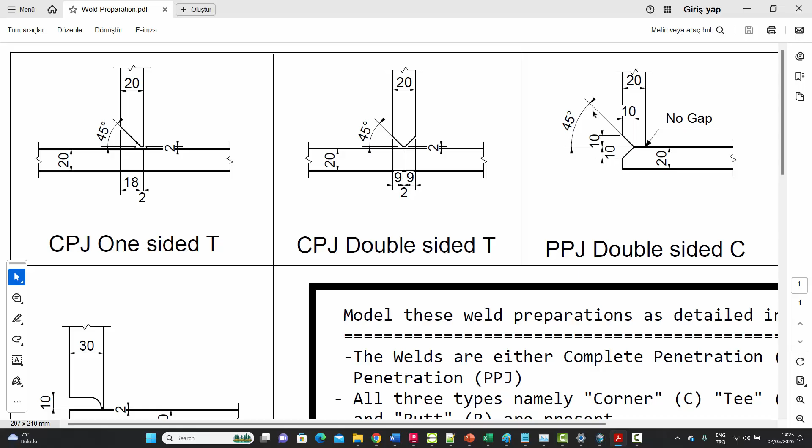This one is a complete penetration joint with the J type preparation, 20 millimeter thickness over here, but the incoming plate is much thicker. And so the cut is going to be done like this with a 2 millimeter root gap over there. Then we have a butt weld situation in which, once again, it's a complete penetration joint, 20 millimeter thicknesses. One side, this type of weld preparation. Whereas in the other one, it's a 40 millimeter thickness plate. Once again, butt weld and complete penetration, and the details are given.

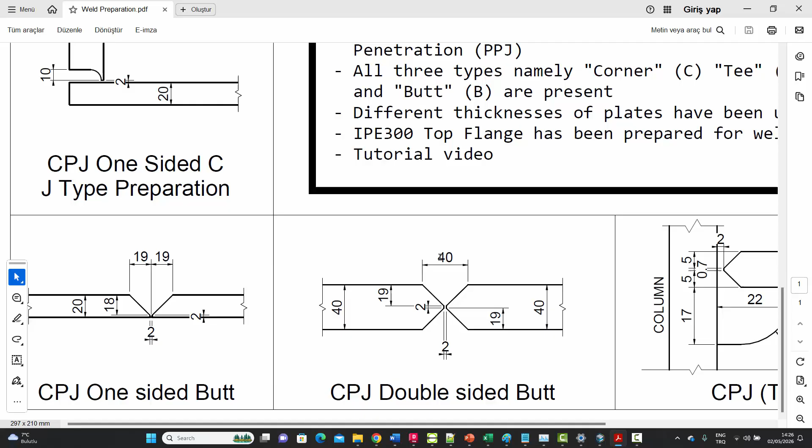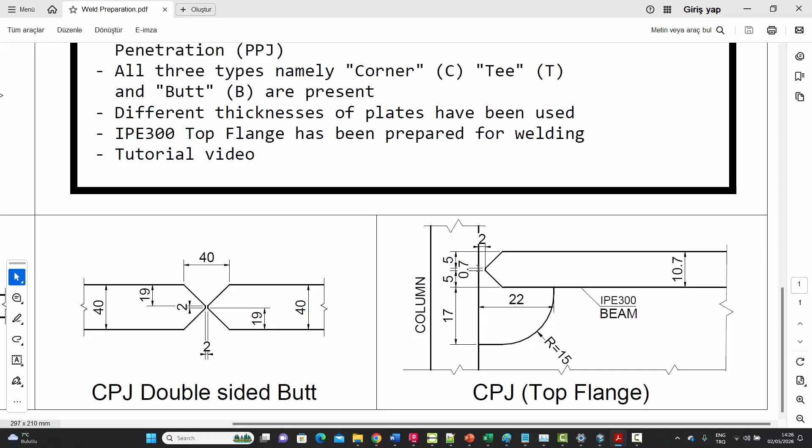The last one is the top flange of a beam and a column. The incoming beam's top flange is going to be cut like this. This is usually called a rat hole, in which this is a complete penetration joint, double-sided, and all the distances are given over here. This is basically the exercise which we are required to do.

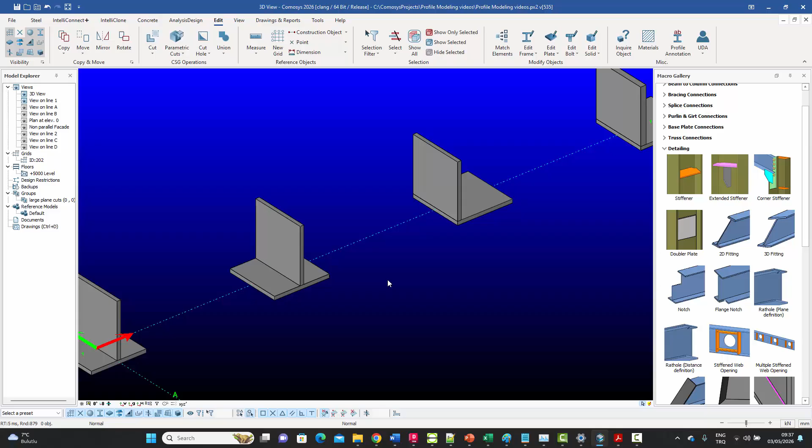So let's begin with the first one, which is basically a T joint with a one-sided weld preparation as shown, 20 millimeter plates. Let's go to the model. I've already created these 6 situations for the plates. So 2 T joints, 2 corner joints, and 2 butt joints, and then also the case of the top flange of the beam. So right now we'll just focus on this one.

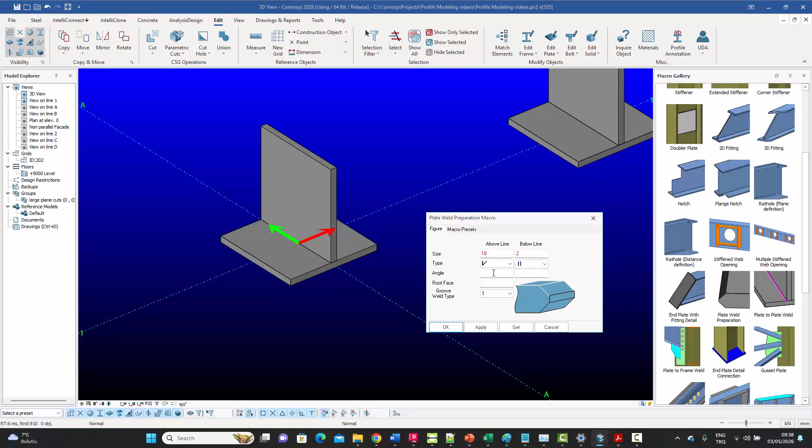So when we want to create weld preparations, we can go to the detailing menu, and under the detailing menu you have this command called plate weld preparation. If you hold the shift key and open it first, what we want is a one-sided weld in a 20 millimeter plate with 18 millimeters. So we can say 18 over there and 2 remaining. For this we choose this symbol, which is the one-sided weld, and for this one we choose this symbol. We don't need to enter the angle, it's 45 degrees by default. It's a T weld, so we apply.

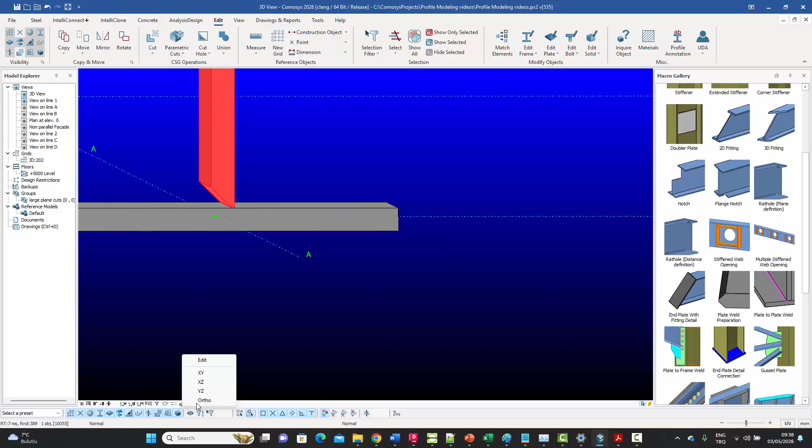Okay, and then we just click on this button, and we basically just click on this edge of the plate. And the moment we do that, let me right click and finish it and turn off the welds. If I look at it from the side, you will see that the exact weld preparation has been made. There's a 2 millimeter gap over here. I can measure this distance. Actually, I didn't enter this distance, so let's undo that and do it again.

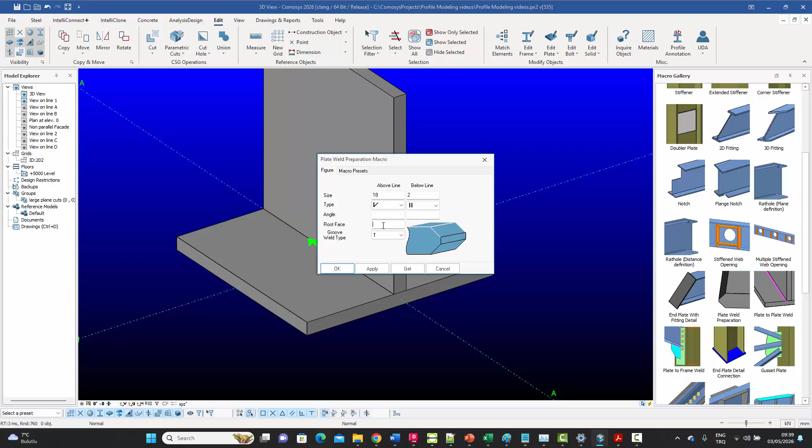We can go back into this command, press the shift key once again. These are okay, but the root face, this is the one I forgot to enter. We can enter it, that's 2 millimeters again. If you go back to the drawing, this is basically this distance of 2 millimeters away from the edge of the plate. So that's the one I had missed. Go back to the model. We've done the settings now. We just go in there again and just show this edge.

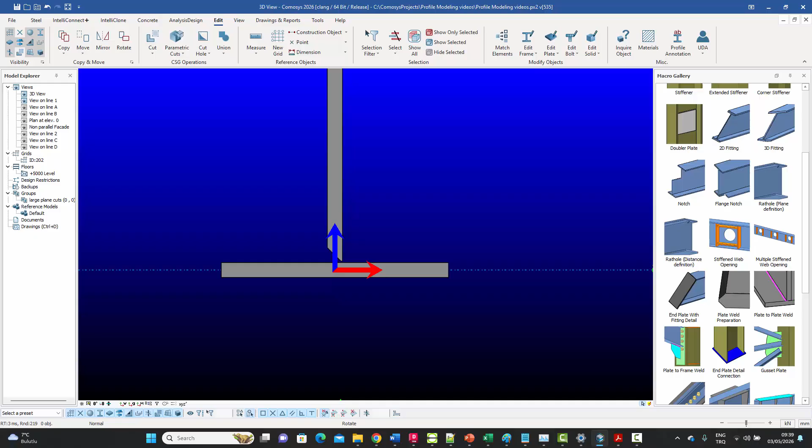And the moment we do it, once again, we can look at it from the side. Click on this button to make it orthogonal, and now we can see that it's properly done. This distance is 2 millimeters, as well as this distance is also 2 millimeters.

Now the next one is basically similar. It's just that it is double-sided, so we have the same weld on both sides. So instead of the 18 millimeters, we'll have 9 and 9 on both sides, and 2 will be left in the middle automatically. The same 45 degrees, the same 2 millimeter root face. So we go back to the model.

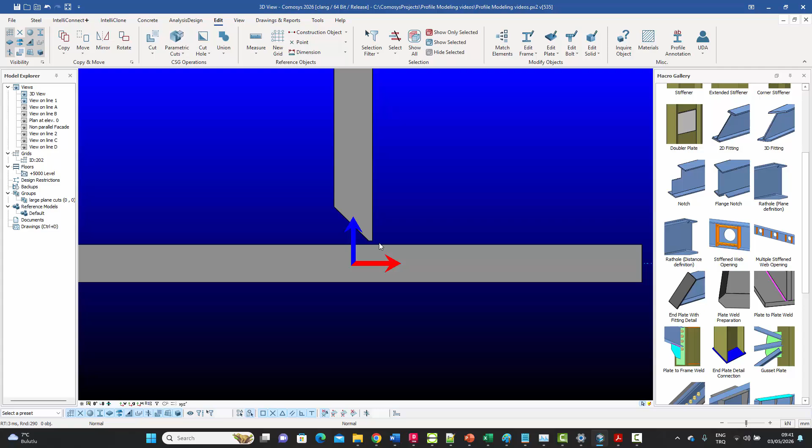We can go to this one over here now. Go back to our command, click on the shift key, open this up. This time, because it's double-sided, we choose the same symbol for both sides. We make this 9 and we make this 9 as well. So 9 on both sides, and the 2 millimeter remains. Say apply, OK. Click on the thing and just show any one of these edges.

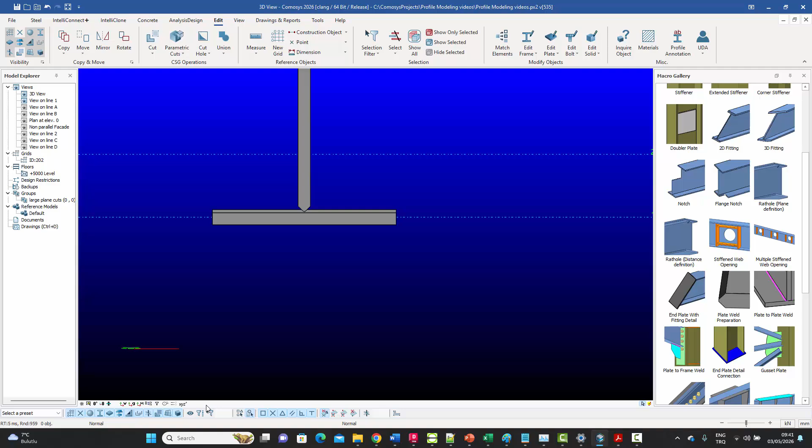And when we do that, let's go and look at it from the side, we can see that the weld has been created. The third one over here is not a complete penetration joint. It's a partial penetration joint, and it's a corner joint, and both the plates have been cut out. So this is a 20 millimeter plate, but it's partial penetration. So 10 millimeters have been cut out and 10 have been left. And also we note that there's no gap over here. So there was a 2 millimeter root gap over there, but there's no gap in this case.

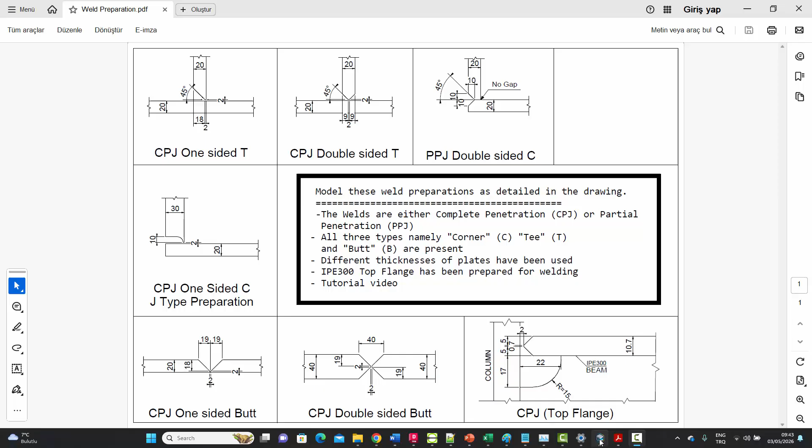So we can go back to the model. This third case over here, go back to our command, press the shift key. So we want this case now, we want 10 and we want 10. So we want partial penetration like that. We want a root gap of 0. So this is the setting which we want, and we can say apply. Okay, and we can click on this button again, and we can select.

So we don't know which edge we are selecting, whether it's the edge of the bottom plate or the other one, but it doesn't really matter because we'll need to do it twice anyways. We just select this edge, and we see that we've cut the top one, and now we can just continue and select the edge of the other one, and there we go. We have managed to create that partial penetration weld with no root gap over there.

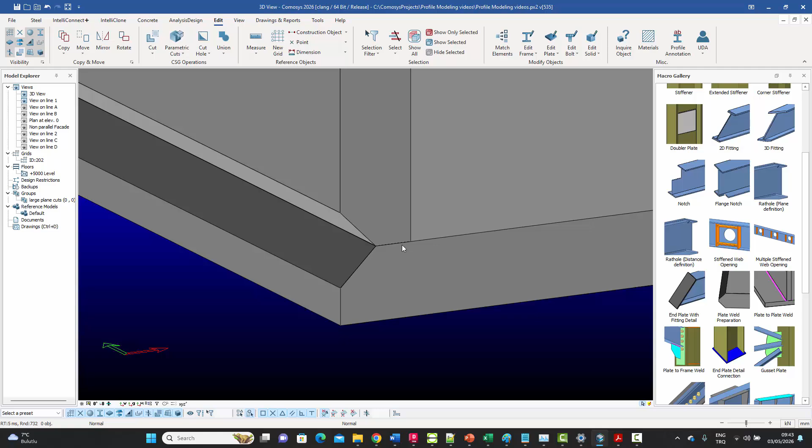The next one over here is once again one-sided, and it's complete penetration, but it's a J-type preparation because it's a very thick plate, so it needs to go like that. It's full penetration, by the way, and 2 millimeter gap left on both sides. So we go back to the model, and we come over here, and this is the one we want. So we click on the shift key, open it up. And because it's a 30 millimeter plate now, and we want full penetration, we'll call it 28.

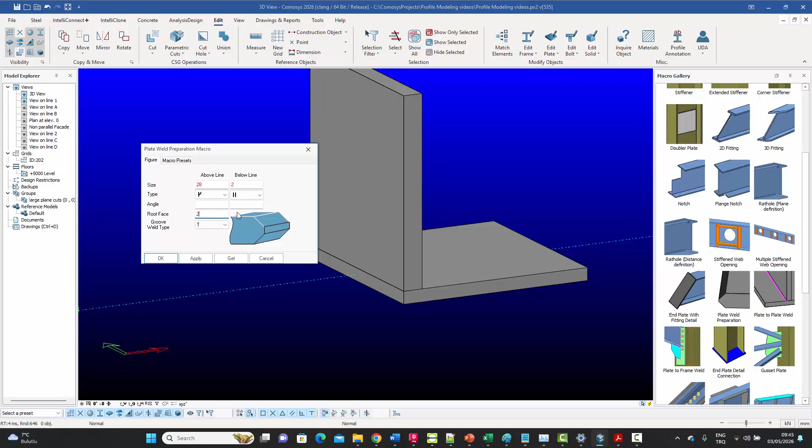And instead of this symbol, we can choose this one to create the J-type penetration. And we need the 2 millimeter root gap as well. Now let's try it first. I think we'll need to change the angle because the default angle is 45. But let's press OK on that, and click on this one and click on this one, and let's look at it from the side.

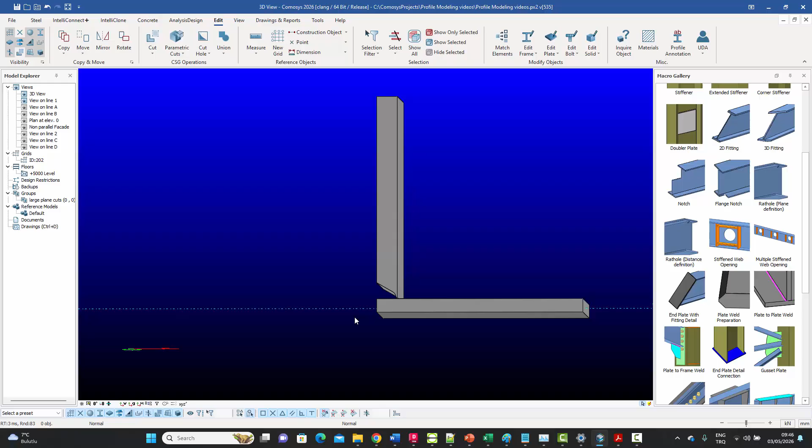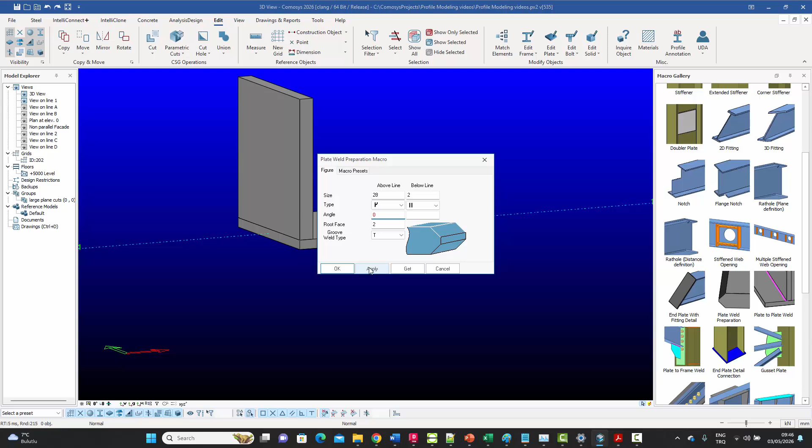We see that it has done the cut in the J-style preparation, but it comes like that, and then there's an angle of 45 degrees, which is not what we want. We want it to go like that, and we want it to come straight out. So if that's what we want, then we'll just undo this, go back into the settings, and this time we put the angle input to be 0. Apply, OK, go back inside, click on the edge once again, and this time you see that we managed to create that weld preparation as shown.

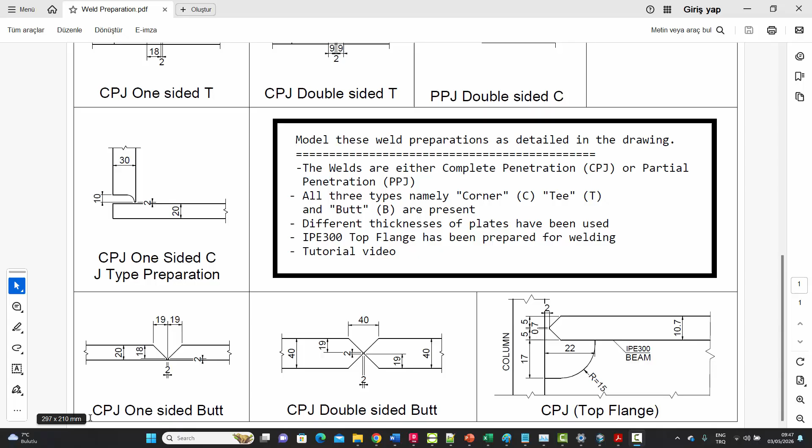This next one is a butt weld now. It's one-sided. It's complete penetration, 20 millimeter plate. So we need 18 and then 2 as shown. So what we will do is we will just go inside, go to the model. This is the plate ready for that. Click on the shift key. This time we select this symbol once again. We want 18 millimeters and 2. So we leave it like that. We'll leave the root and we'll leave the angle input empty as well.

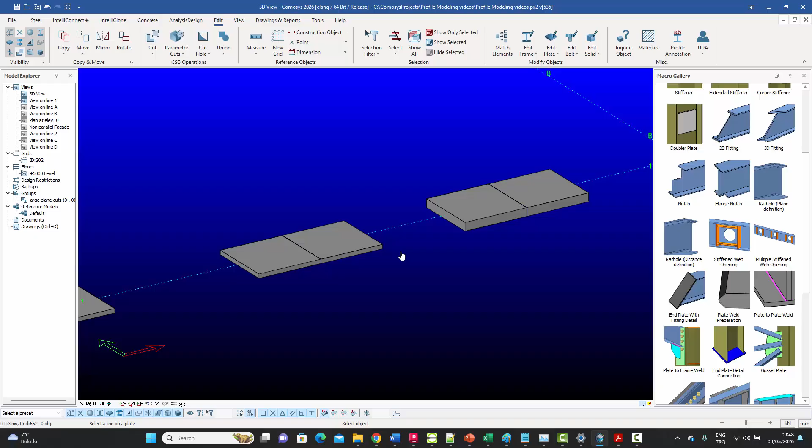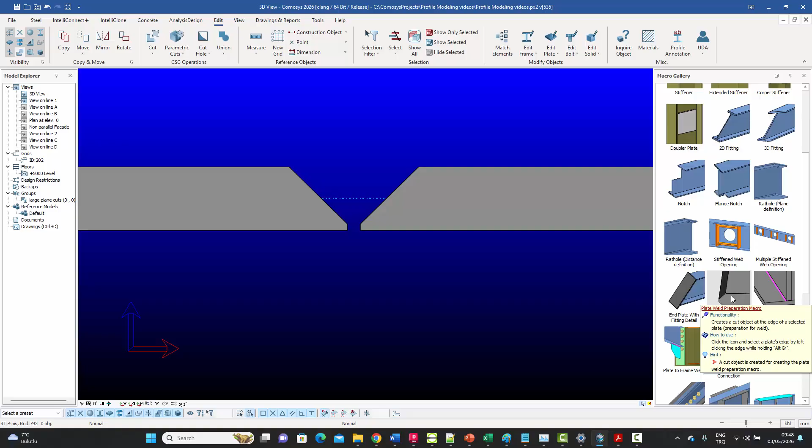Root at 2 millimeters. Apply, OK, and we can click on the command and just show this edge, and then whichever one it cuts, we just select the other edge as well, like that. So we see that we have managed to achieve the weld. Actually, now this one is actually 4 millimeters, so we should have actually inputted it to be 1 millimeter, because one is going to come from both sides.

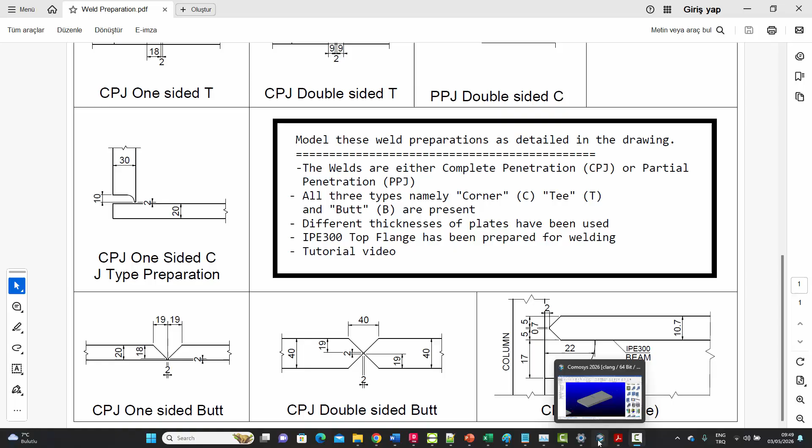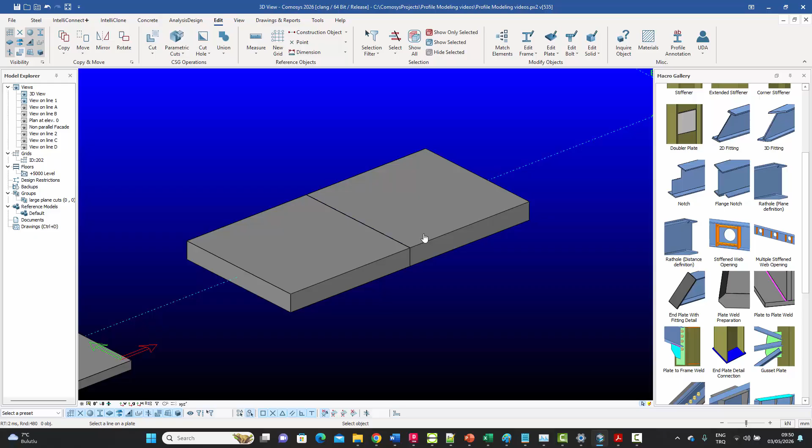This last plate example is a thicker plate, 40 millimeters, so it's double-sided. Once again, the total distance is 2, so we'll keep the root at 1 millimeter, and 19 and 19 and whatever is left over there. So we go back to the model, click the shift key, open this one up, call this 19, and change this one to the other option, like that. So we cut it from both sides, and the root face we bring it to 1, like that. Click on it, select this edge, oh, I'm sorry, I think I made a mistake. Let's undo that.

Let's press the shift key again. We need to do a two-sided one, but we need to make this one 19 as well. Yeah, sorry, that was a mistake. So 19, 19 from both sides, like that. Click on it, click on the key, so we go on that edge, so we get a double-sided one. Click on this edge, so we get another double-sided one.

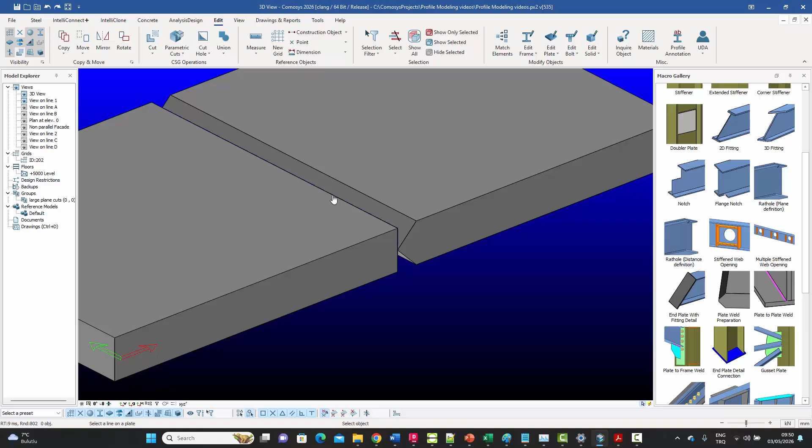Look at it from the side. Click on this one, and you see now the total distance is 2 millimeters as required. Now, this final one, which we have over here, is not a plate cut, but it's an IPE 300 beam, and the top flange has been cut out with a double-sided weld preparation, and also this rat hole at the back side. And this is what we need to create.

The distances: because the flange is 10.7 millimeters, we've left 0.7 millimeters as far as the straight side is concerned, and 5 millimeters on both sides. And then this distance is given as 22, and this total distance is given as 17, and the gap between the column face and the beam is given as 2 millimeters. So just keep those numbers in mind.

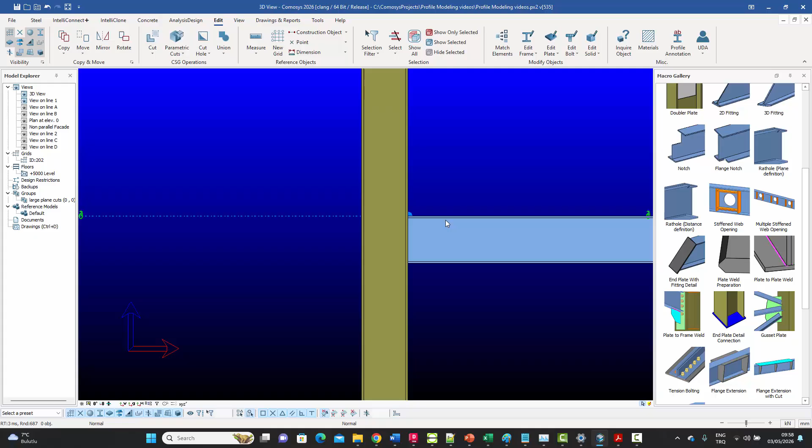We go back to the model. This is basically the beam and the column. We just zoom in like that. And this time we're not going to use this plate weld preparation, but rather we're going to use this one, which is rat hole with the distance definition. So we just click on this rat hole icon over here. We select the beam, and then we show it this point over here.

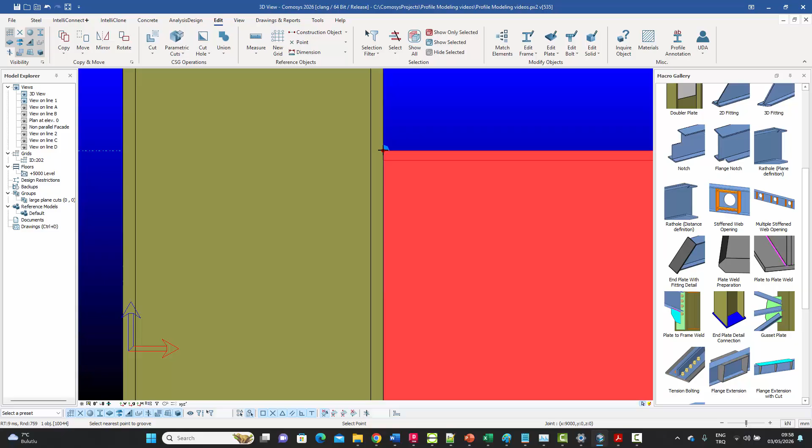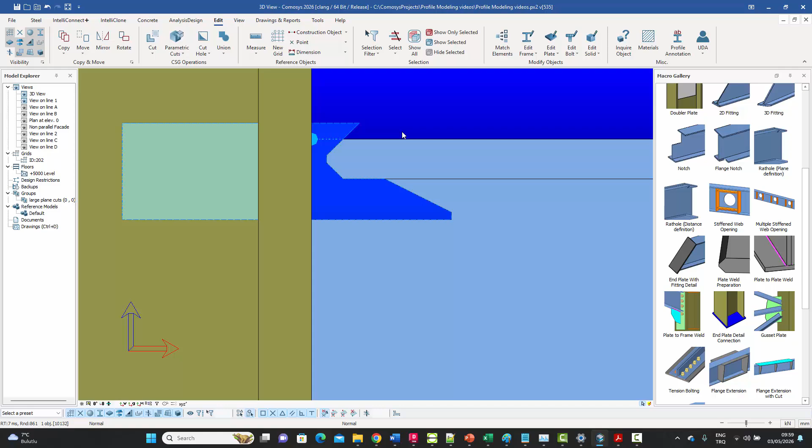And when we do it, it creates a cut over there, which is a bit different from what we want, and therefore we need to explode this and modify it. But it gives us the basic structure. So let's select the cut, click on the M key, which will turn on the macro, and press enter. And we see our inputs are given over here.

So we remember this one was 0.7 straight portion, and it was a 5 millimeter cut on both sides, so we can enter those numbers directly. Then we remember that the distance from the face was 2 millimeters, so that's given over here. Now, this distance vertically was given as 17, and this one was given as 22. Since this is 5 and this is 2, that's already 7, so I need to add another 15 to make this total 22.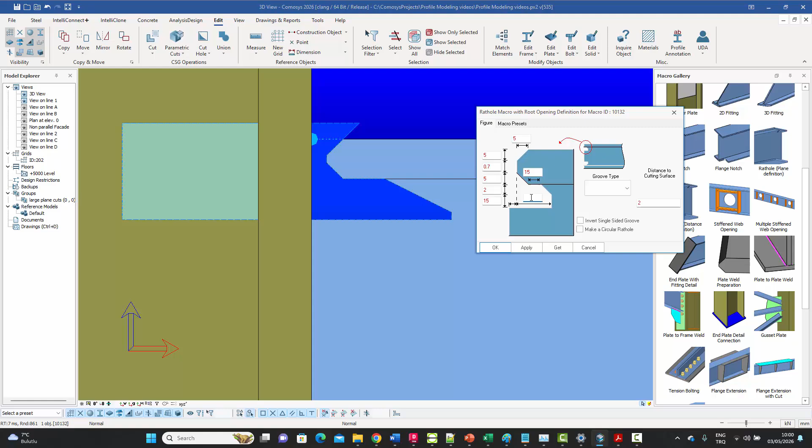And to make the vertical one 17, the shape is different, so there'll be an extra point, and that's why I'll need to explode it. But I need to give any two numbers over here which make the total 17. So I can just say 2 and 15, for example. For this one, I need this total distance to be 22 as well. So since it's already 2 over here, we can enter 20 like that. If we do that and press OK, we will get the basic shape of 2 millimeter gap over here.

5 millimeters, 5 millimeters. This total distance, let's just measure it from here to here. It's 22 millimeters, and this vertical was given as 17. That's 17 millimeters. It's just that we don't have the rounding, because if I turn on the handles, you will see that the macro by default introduces another point over here, which is not what I want. So obviously I can play around with this.

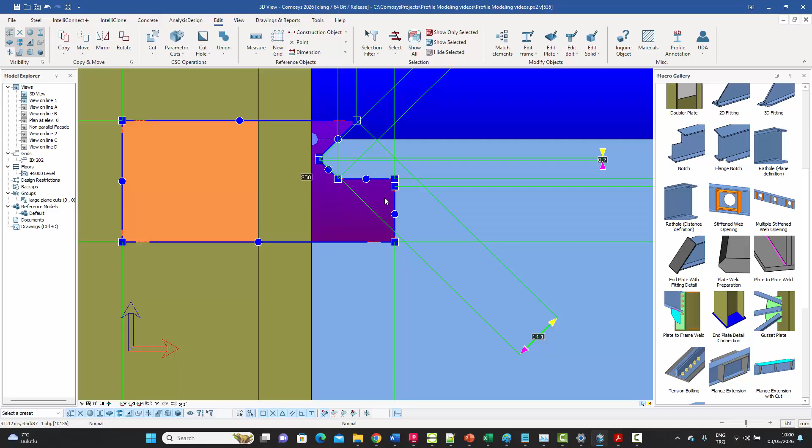What I can do is click on the M and right click and say explode, like that. And I can now select this cut, right click on it, and convert it into a polygon cut. For that, it'll ask which face you want to be the definition. I'll keep the middle face to be the definition, like that. And now it's a polygon cut.

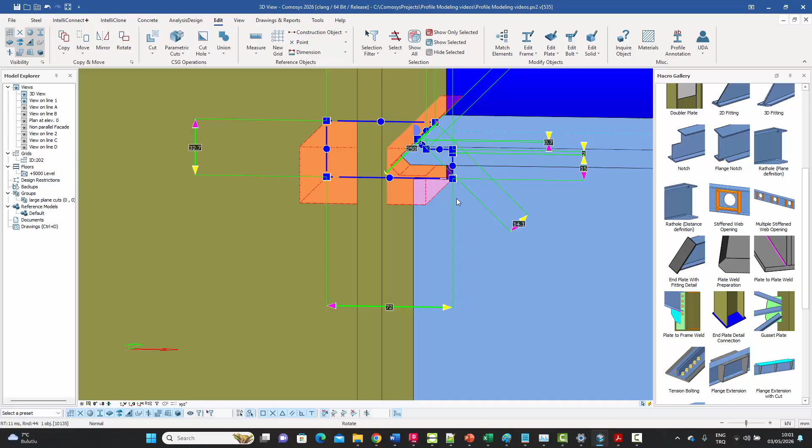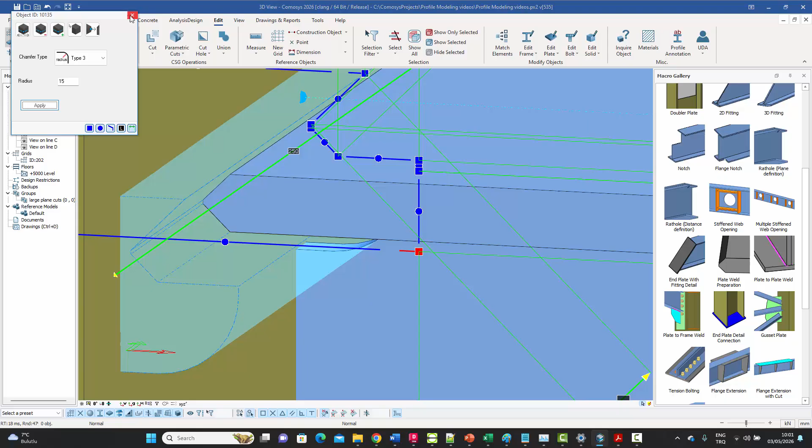And now what I can do is select this. This total is 17. I need a 15 millimeter chamfer, and since it's going to be exact over there, I'll just select this and choose this type, and I can try 15 like that. Let's see what happens over there. Yeah, there we go. So that was basically the cut which we were looking for.

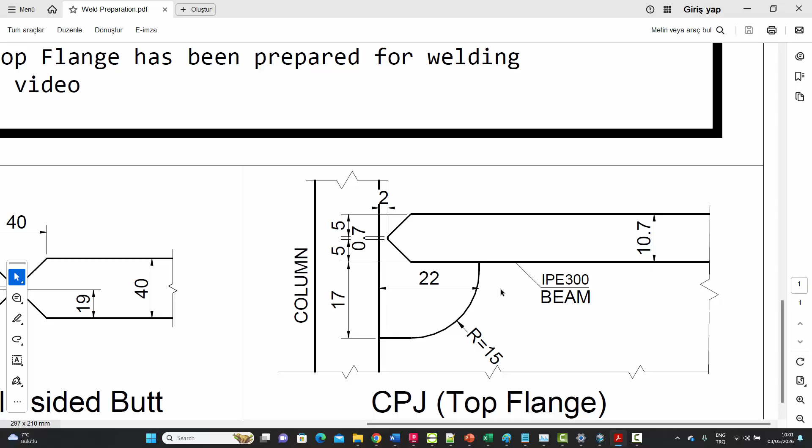We've got all the dimensions according to what the requirement over here was. It's a rounded cut now. We could have used the other one as well. Both can work, but since this is the assignment, we've gone the extra mile to make sure everything is exactly the way it was asked for.